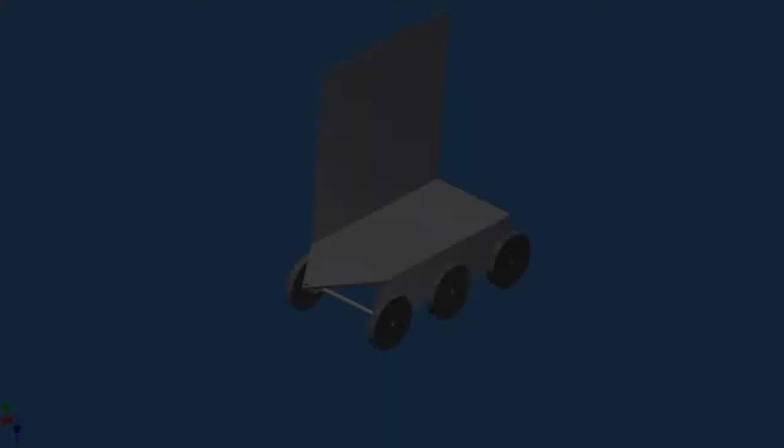Let's look more deeply into our idea. We have a regular truck trailer, whose walls and roof are made from timber. The reason we chose timber is that it is capable of surviving extreme desert conditions.

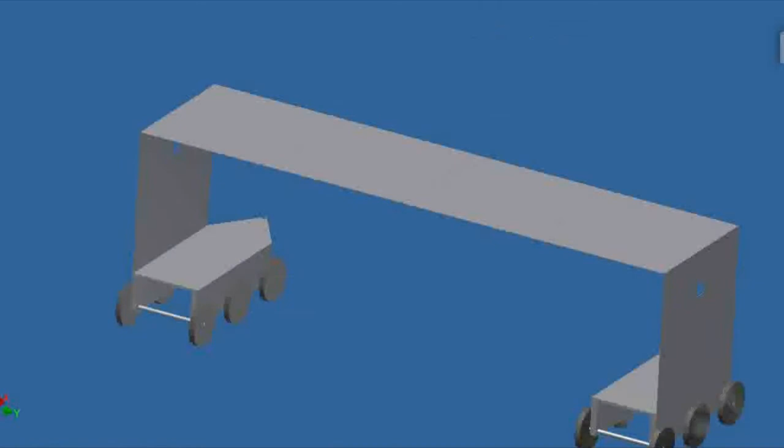One of the walls has a feature to bend 90 degrees. By combining two of these trailers with bended walls, we create a basic structure for a building. After adding additional parts, we get a movable structure adjusted for working, living, and studying conditions.

Two trailers make one set, with an area of approximately 120 square meters. By having 11 of these sets, we can arrange the International School of Performing Arts with a common house, school, canteen, bedrooms, and bathrooms.

With the help of Ra, we will provide electricity to all our pyramids located in our camp.

Did you know that within 6 hours, deserts receive more energy from the sun than humankind consumes within a year? Being located in the middle of the desert, it is obvious to use the energy of the sun. This is the best way to get electricity.

With an array of photovoltaic cells, we can provide all of our buildings with electricity. The structure of these arrays helps to protect them from typical desert conditions like sandstorms. With the usage of this technology, it will be much faster and much easier to convert sun power to electricity and to deliver it to the buildings.

Regarding the water supply, why not use the rainwater that appears every year and lasts for 1 month? We figured the best idea to get and store the water is to install a big tank next to every set. The water from the rain will be gathered on the roof of a building and go down through the pipes into a tank.

In the first part of the tank, the water will be cleaned by the filter, and after that, it will go to the storage part of the tank, where people can take it whenever they need to.

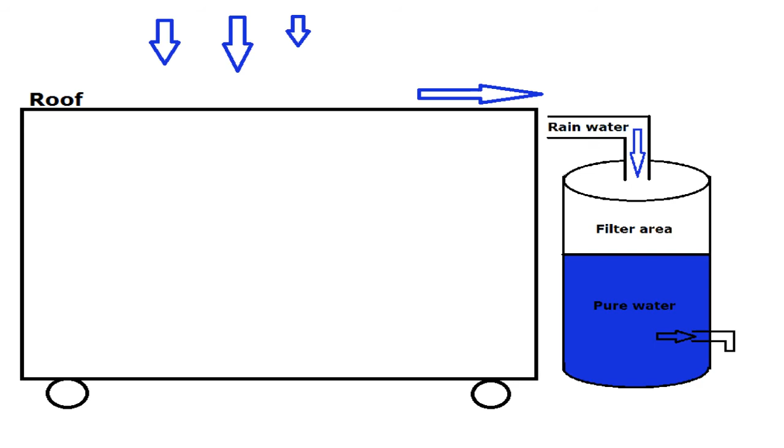Waste. To solve this problem, we will use the experience of already existing companies. The reason for that is that they have wide knowledge about the topic and also operate within the same goal, helping people living in extreme conditions.

The perfect example of a company like this could be Sun Energy, which has developed a technology of turning waste into electricity. Making a partnership like this would benefit both sides.